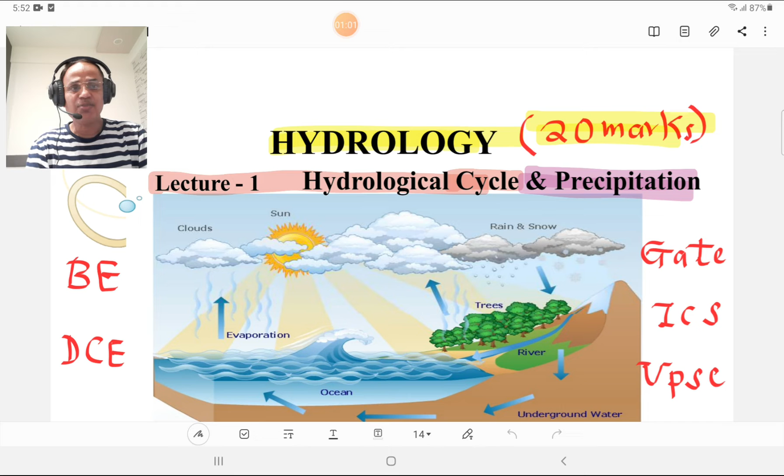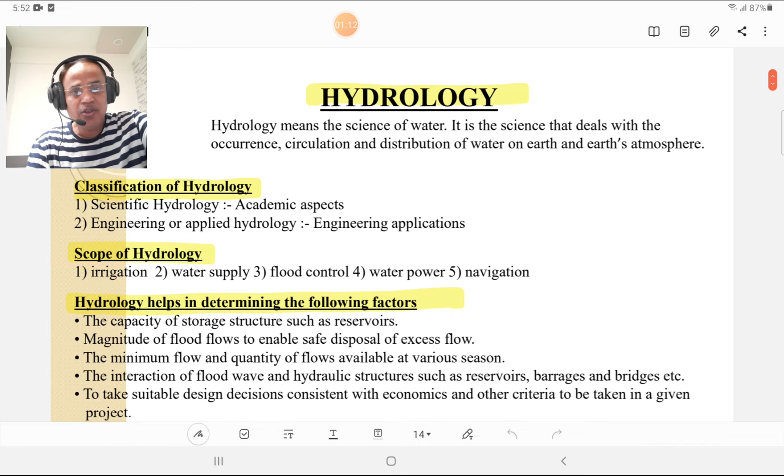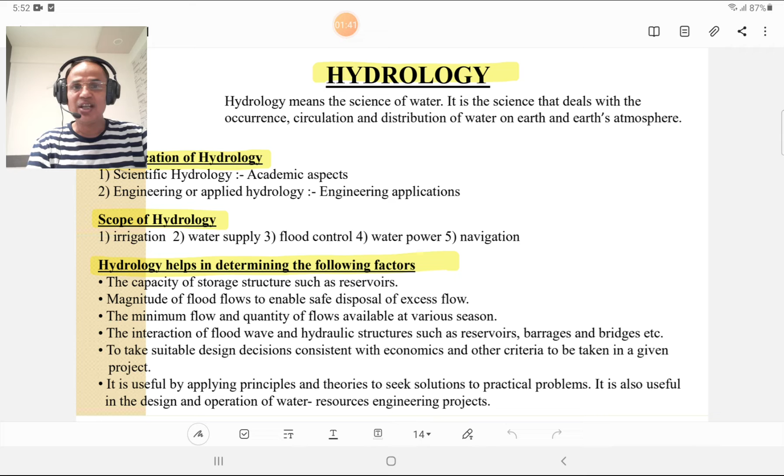First of all, everybody must know what hydrology is. Hydrology means the science of water. It is the science that deals with the occurrence, circulation and distribution of water on earth and in earth's atmosphere. Hydro means water and logy means science, so hydrology means science of water.

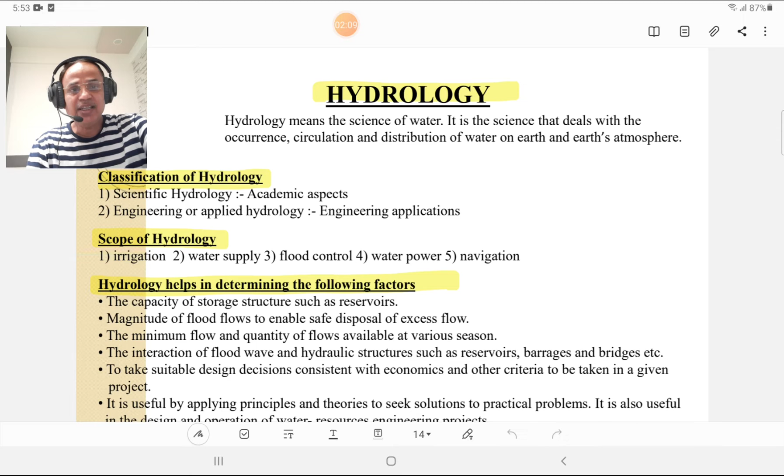Classification of hydrology: scientific hydrology is for academic aspects, and engineering or applied hydrology is for engineering applications. What is the scope of hydrology? Hydrology is useful in irrigation, water supply, flood control, water power and navigation. Hydrology helps in determining the following factors: the capacity of storage reservoir.

The capacity of storage reservoir is calculated by using hydrology, the magnitude of flood flows to enable safe disposal of excess flow. Hydrology is important for determining the minimum flow and quantity of flow available at various seasons such as dry season, wet season, summer season, winter season and rainy season.

It is useful for the interaction of flood wave and hydraulic structures such as reservoirs, barrages and bridges etc., to take suitable design decisions consistent with economics and other criteria in a given project, and it is useful for applying principles and theories to seek solutions to practical problems. It is also useful in design and operation of water resources engineering projects. So hydrology is very important in irrigation engineering as well as water power engineering.

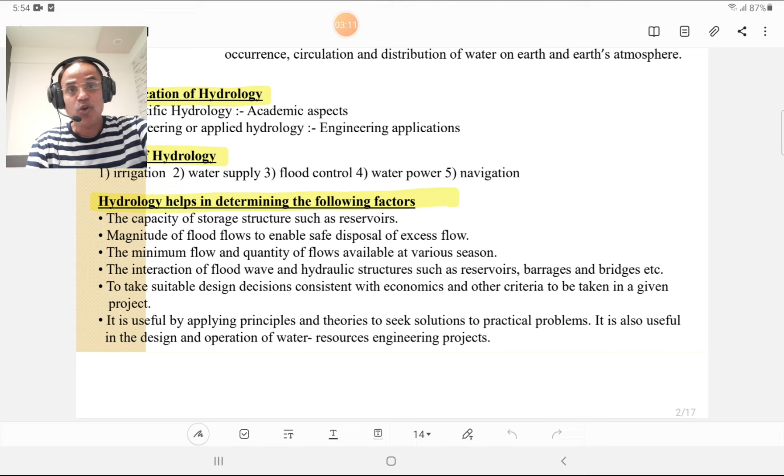The supplementary sciences to hydrology are meteorology, geology, statistics, chemistry, physics, and fluid mechanics. All these sciences are related to each other to derive the various principles.

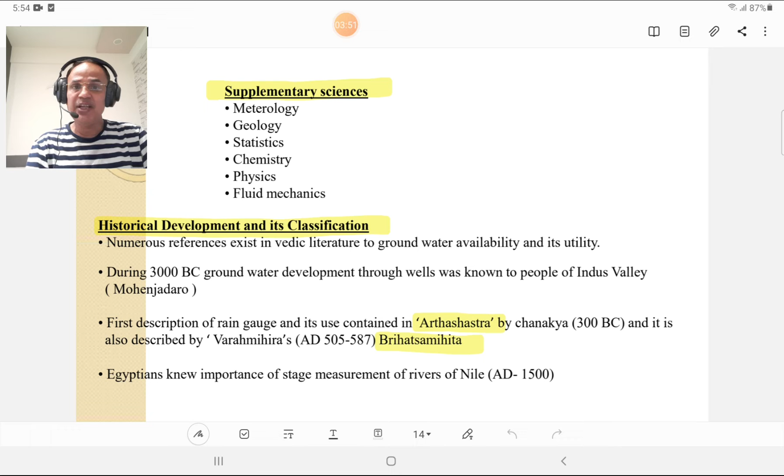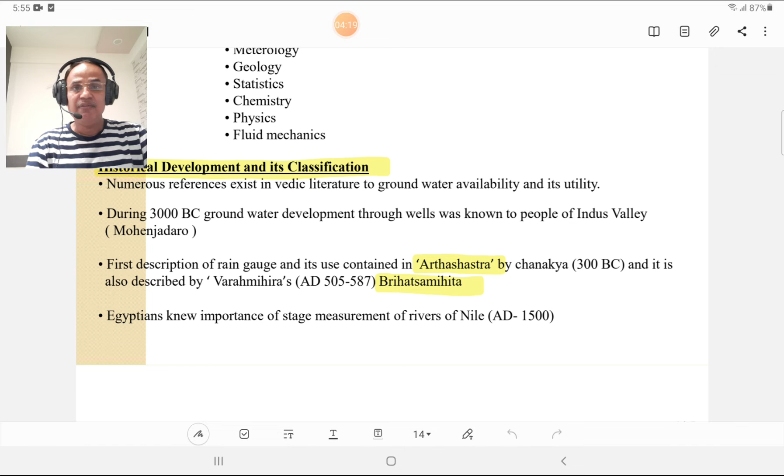What is the historical development of hydrology and its classification? Numerous references exist in Vedic literature to groundwater availability and its utility. During 3000 BC, groundwater development through wells was known to the people of Indus Valley, that is Mohenjo-daro Sanskriti. First description of rain gauge and its use is contained in Arthashastra by Chanakya in 300 BC, and it is also described by Varaha Mihira in AD 505 to 587 in Brihat Samhita. Egyptians knew the importance of stage measurement of river Nile in AD 1500.

Then we will discuss the important cycle. This cycle must be known to all people, but we describe it scientifically - that is the hydrological cycle. It is the cycle followed by water in three phases: first is evaporation, second is precipitation, and third is runoff. The amount of water remains unchanged. For hydraulic equilibrium, inflow of water is equal to outflow of water plus water stored. The second equation is precipitation equals runoff plus evaporation.

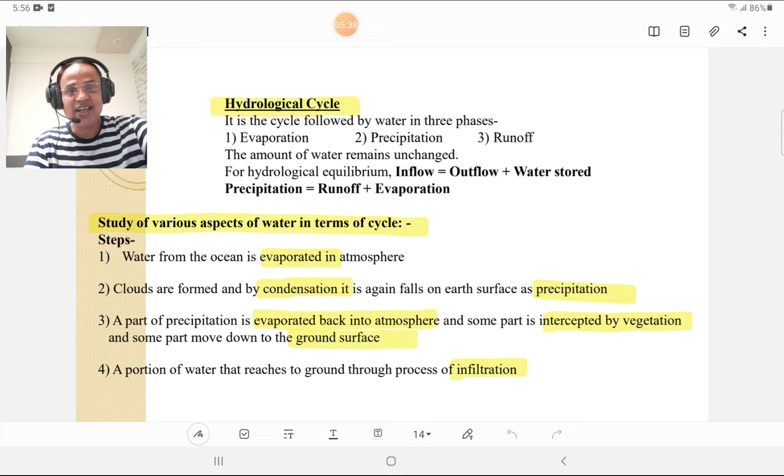These equations are also known as water budget equations. Study of various aspects of water in terms of cycle is termed as the hydrological cycle. Steps: water from the ocean is evaporated into the atmosphere. Clouds are formed and by condensation it again falls on earth's surface as precipitation. A part of precipitation is evaporated back into atmosphere and some part is intercepted by vegetation and some part moves down to the ground surface. A portion of water that reaches the ground goes through the process of infiltration. The portion of infiltration or precipitation which reaches the stream channel is termed as runoff.

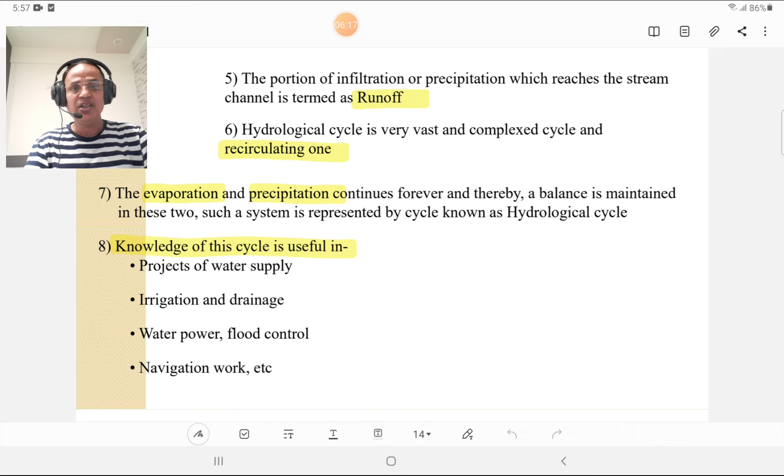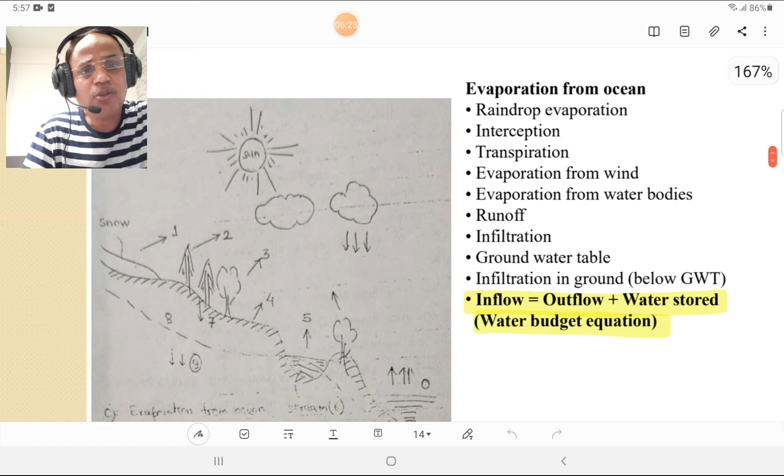The hydrological cycle is a very vast and complicated cycle and it is also a recirculating one. The evaporation and precipitation continue forever and thereby a balance is maintained between these two, and such a system of balance between evaporation and precipitation is termed as the hydrological cycle. The knowledge of this cycle is useful in projects of water supply, irrigation and drainage, water power, flood control, and navigation work, etc. So knowledge of the hydrological cycle is very important. This hydrological cycle is explained in terms of a diagram here. The diagram shows the evaporation from the ocean also.

Evaporation from the ocean is shown here. Then raindrop evaporation is also there. Interception is also there. Transpiration is also there, including transpiration from trees.

This number 5 is evaporation from the water bodies. Then evaporation from wind, runoff, infiltration, and groundwater table. This is the groundwater table shown, and infiltration of the ground below the groundwater table.

Inflow is equal to outflow plus water stored. This is the water budget equation, and this is nothing but the hydrological cycle. The sun is shown here, and clouds are also shown, formed by condensation. Precipitation is also shown from the clouds. Such a cycle is termed as the hydrological cycle.

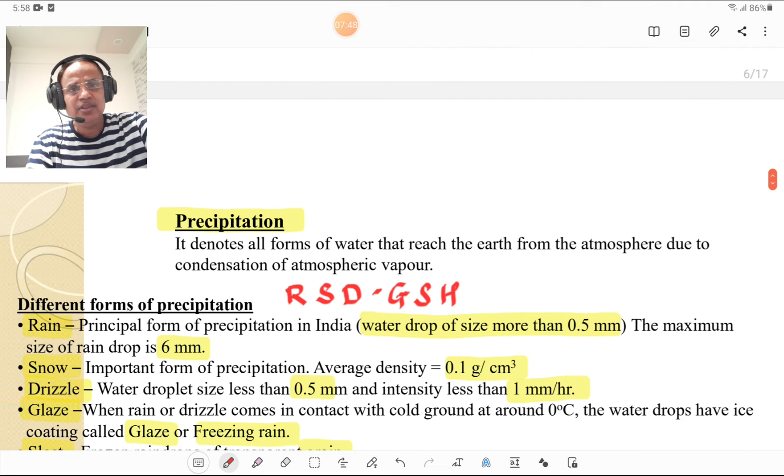Then we will move to our second topic, that is precipitation. Precipitation denotes all forms of water that reach the earth from the atmosphere due to condensation of atmospheric vapor. The condensation of atmospheric vapor in terms of water is termed as precipitation.

Different forms of precipitation are very important and are always asked in competitive examinations, so we must remember RSD and then GSH, the first letters of each form. R means rain, the principal form of precipitation in India. The water droplet size is more than 0.5 mm and up to 6 mm, so water droplets from 0.5 mm to 6 mm are termed as rain.

Then second is S for snow, an important form of precipitation with average density of 0.1 gram per centimeter cube. Then comes drizzle: when water droplet size is less than 0.5 mm and intensity is less than 1 mm per hour, such a form of precipitation is termed as drizzle.

Then comes glaze. G means glaze: when rain or drizzle comes into contact with cold ground at around 0 degrees Celsius, the water drops get an ice coating. Such ice-coated water drops are called glaze or freezing rain. Then S means sleet: frozen raindrops of transparent grain are termed sleet.

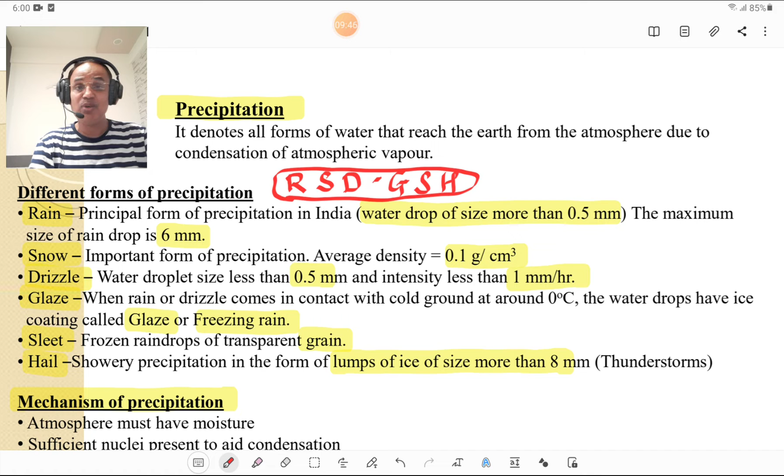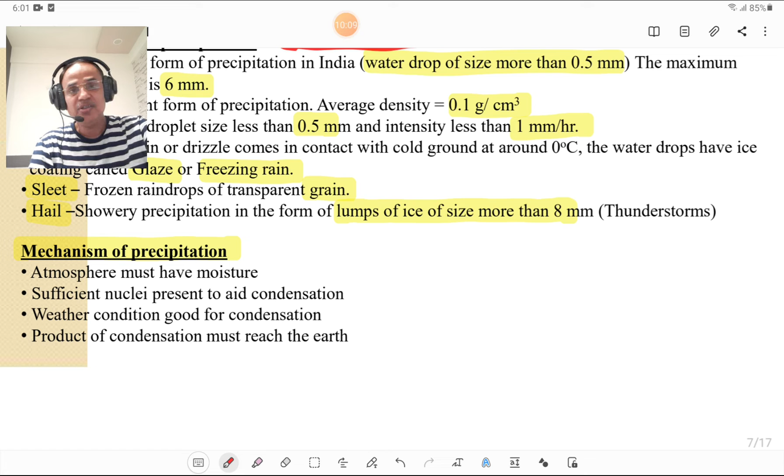Then we will discuss the mechanism of precipitation. For precipitation, the atmosphere must have moisture, sufficient nuclei present to aid condensation, weather conditions good for condensation, and the product of condensation must reach the earth. This is important for the mechanism of precipitation.

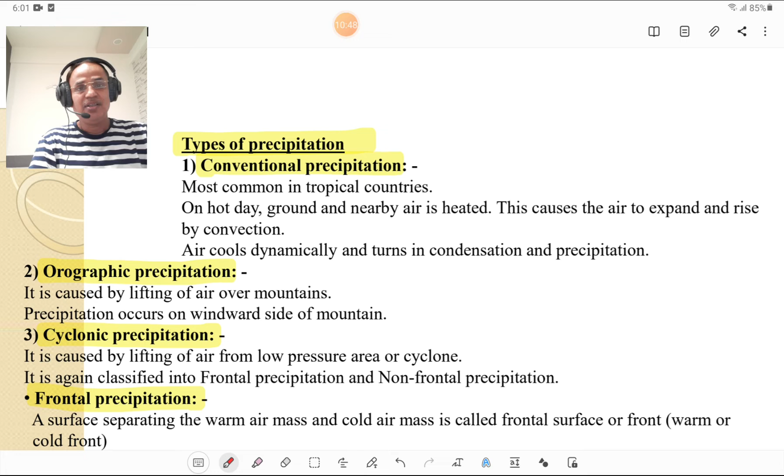Having discussed the forms of precipitation, we now discuss the types of precipitation. First is convective precipitation, most common in India and in tropical countries. On a hot day, the ground and nearby air is heated, causing air to expand and rise by convection. The air cools dynamically and turns into condensation and precipitation. So heating of air causes precipitation; such heating, condensation and convection is termed convective precipitation.

Second is orographic precipitation, caused by lifting of air over mountains. Precipitation occurs on the windward side of the mountain, the side that carries the wind, while the other side is called the leeward side. Third type of precipitation is cyclonic precipitation, caused by lifting of air from a low pressure area or a cyclone.

Cyclonic precipitation is caused by lifting of air from a low pressure area or cyclone, and is classified into frontal precipitation and non-frontal precipitation. Frontal precipitation occurs where a surface separating the warm air mass and cold air mass is called a frontal surface or front.

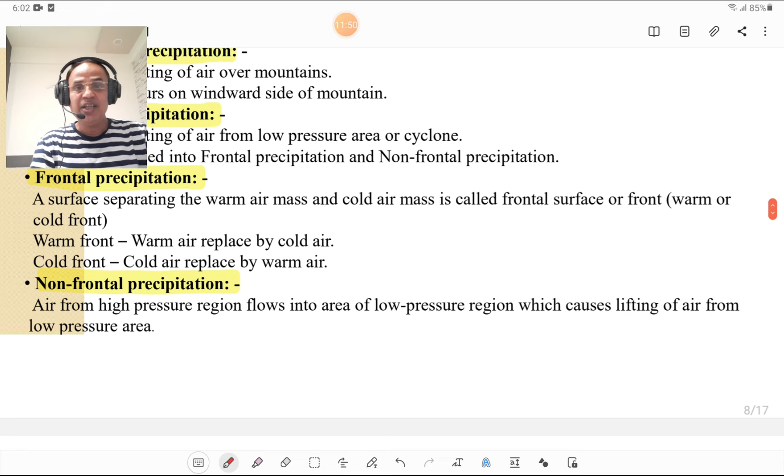In a warm front, warm air is replaced by cold air, and in a cold front, cold air is replaced by warm air; such precipitation is called frontal precipitation. Non-frontal precipitation is when air from a high pressure region flows into an area of low pressure, causing lifting of air from the low pressure area, and such precipitation is called non-frontal precipitation.

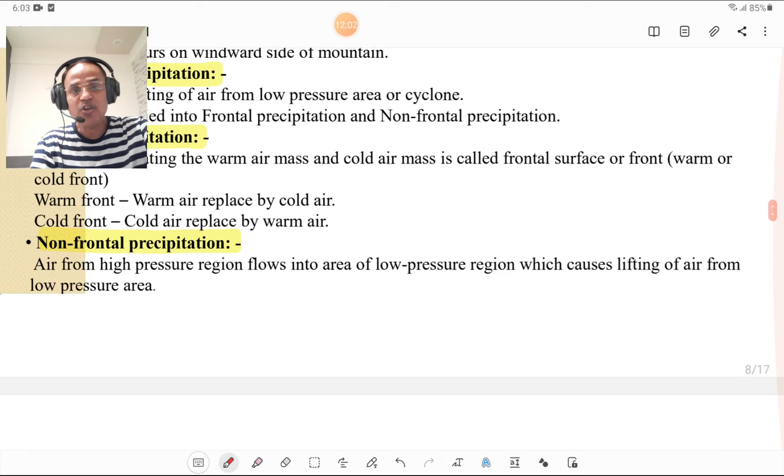Then we will discuss an important topic in precipitation, measurement of precipitation. Precipitation, you must know, is nothing but rainfall. Rainfall is the depth of water in centimeters or millimeters that would stand on the earth provided it were not lost by evaporation or infiltration or any other manner. That is, the depth of water received from rainfall which is not lost by evaporation, percolation, or any other manner.

Various types of gauges used for measurement of rainfall or precipitation are automatic and recording type gauges, and second is the non-recording type of gauges.

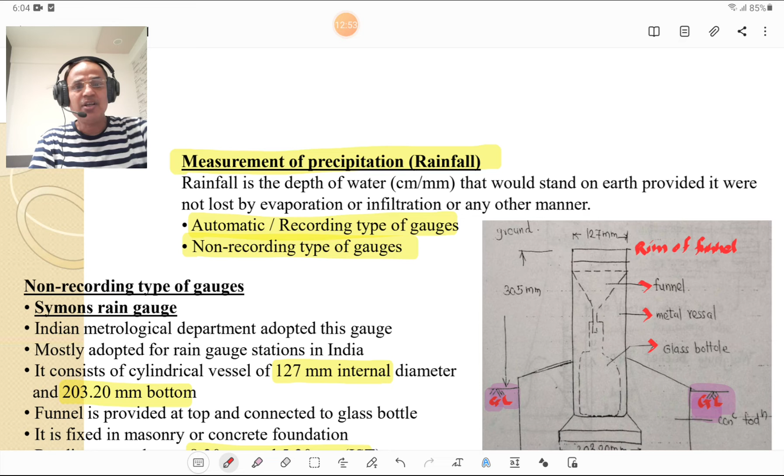Non-recording type of gauges, the Symons rain gauge is very important, and it is used from historical time, from the ancient time of the British. Symons rain gauge was adopted by the Indian Meteorological Department, mostly for rain gauge stations in India.

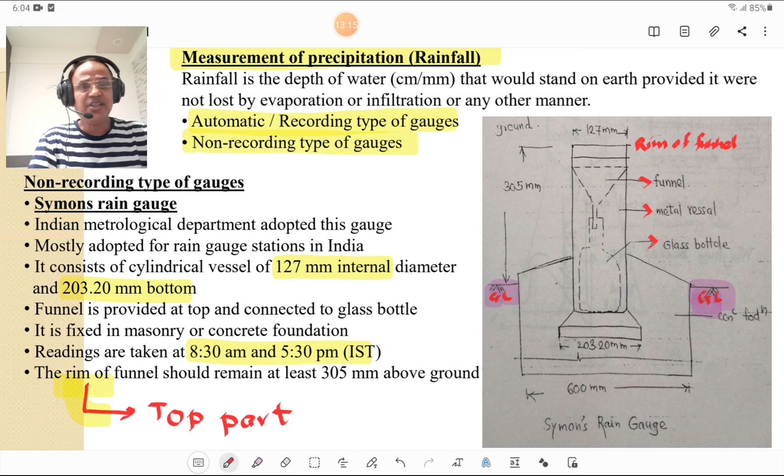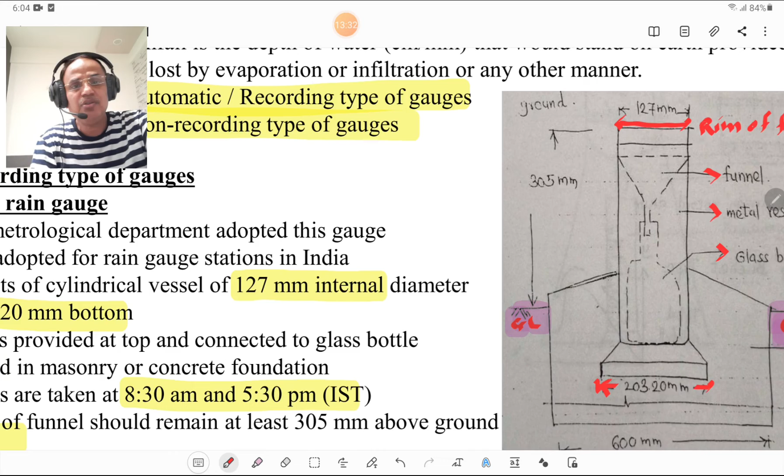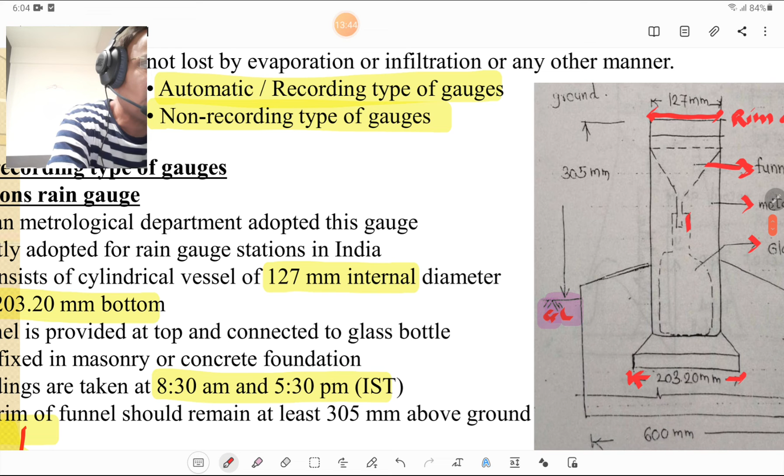It consists of a cylindrical vessel of 127 mm internal diameter, shown here as 127 mm internal diameter, and 203.20 mm at the bottom. This is the bottom size. A funnel is provided at the top. Please look at this figure. This is the funnel, provided at top, and it is connected to a glass bottle. This is the glass bottle, and the funnel is connected to the glass bottle.

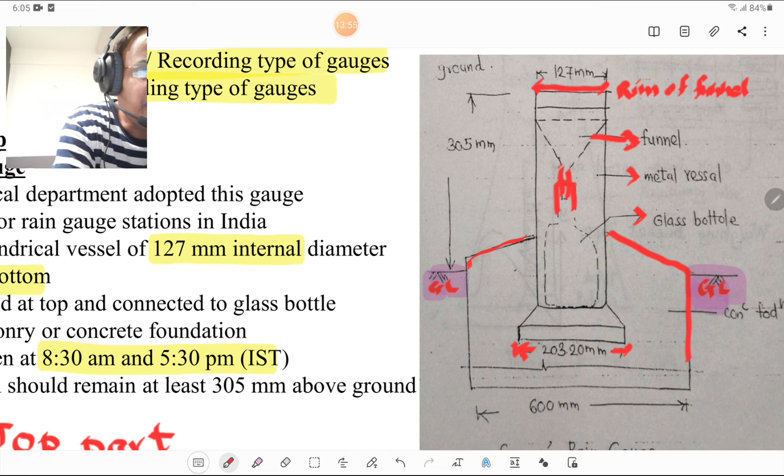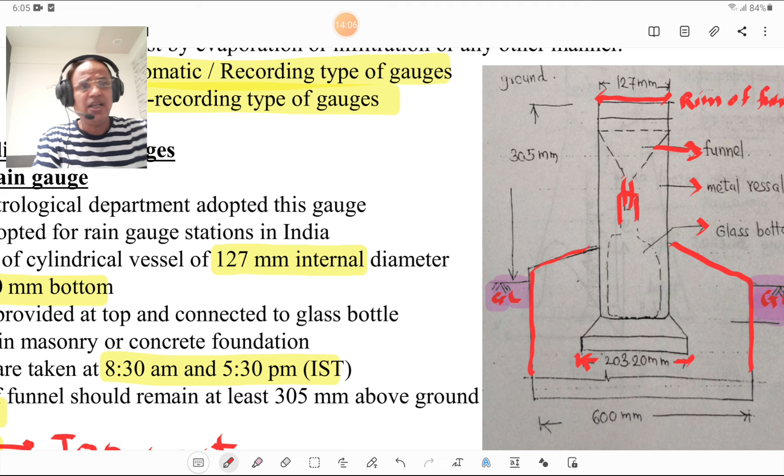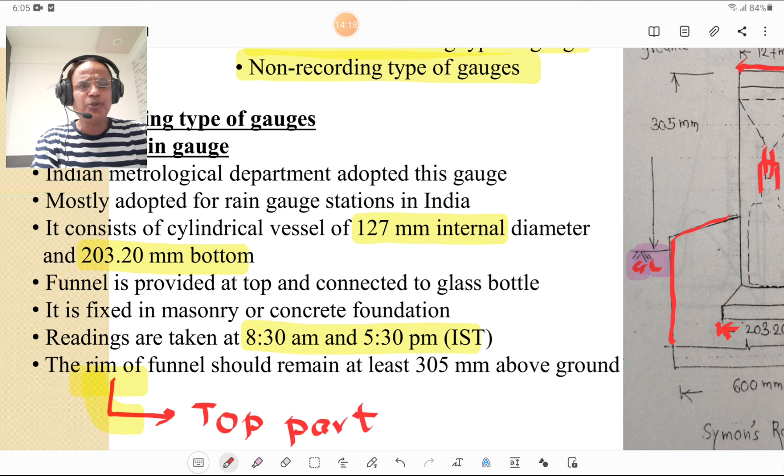It is fixed in masonry or concrete foundation. You must know the system: there is one vessel, the vessel contains a bottle, on top of the bottle there is a funnel, and this whole system is fixed in the foundation. Readings are taken at 8:30 am and 5:30 pm Indian Standard Time. The rim of the funnel should remain at least 305 mm above the ground. Rim means this, the top of the funnel. This should be 305 mm above the ground, if this is the ground level.

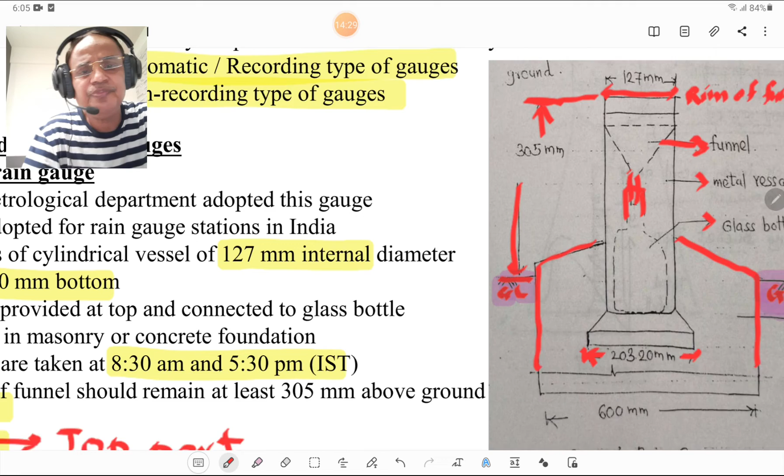This is only the first type, the non-recording gauge. Now we will discuss the recording type of gauges, termed as automatic or self-recording gauges. First is the weighing bucket type.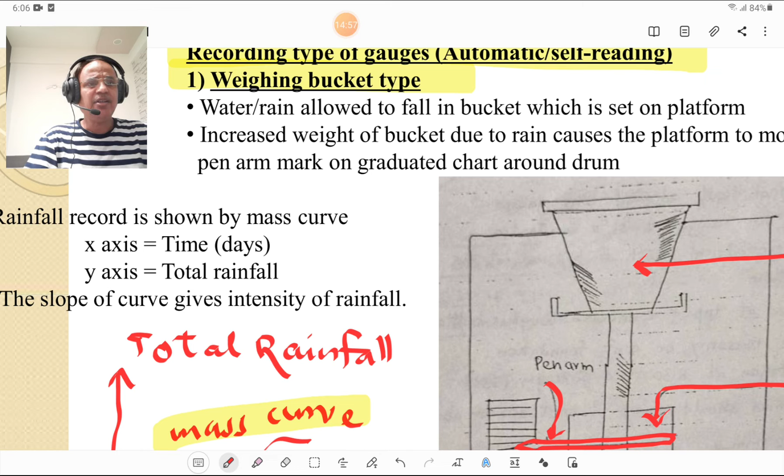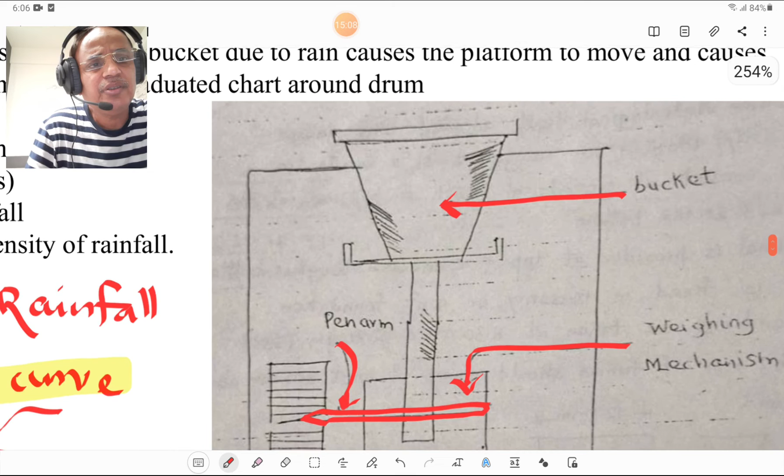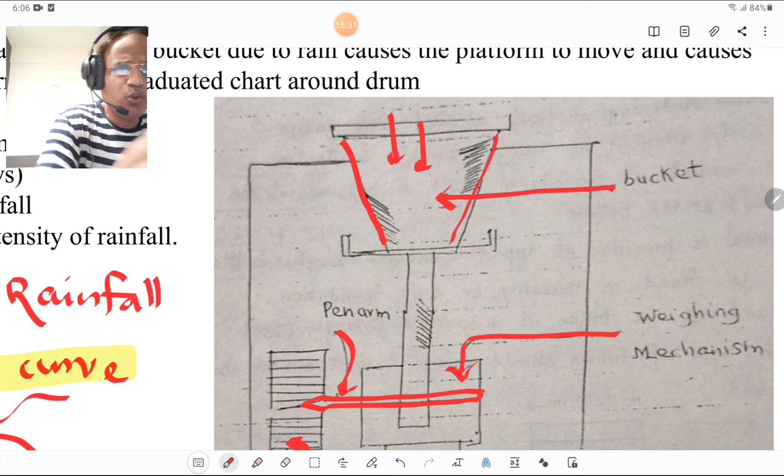Water or rain is allowed to fall into the bucket which is set on a platform. Increased weight of the bucket due to rain causes the platform to move, and the pen arm marks on the graduated chart around the drum. Please look at this figure. This is the bucket, as shown here. If rainfall is received in the bucket, it causes the pen arm to move due to the weight of water, and this pen mark is moved by the weighing mechanism on the clock-driven record drum, and the mass curve is plotted.

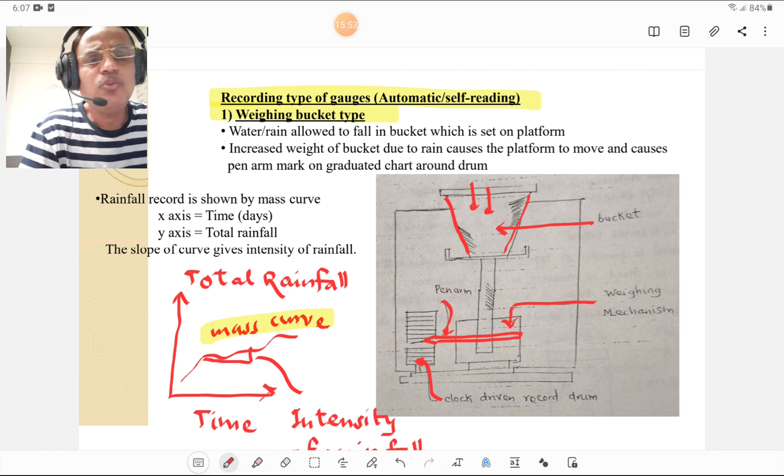Water or rain allowed to fall into the bucket set on the platform causes increased weight, and the pen arm marks the graduated chart on the drum, and the rainfall record is shown by the mass curve. On the x-axis time is plotted, on the y-axis total rainfall is plotted, and the slope of the curve gives the intensity of rainfall. The time is in days and total rainfall is in mm or centimeter.

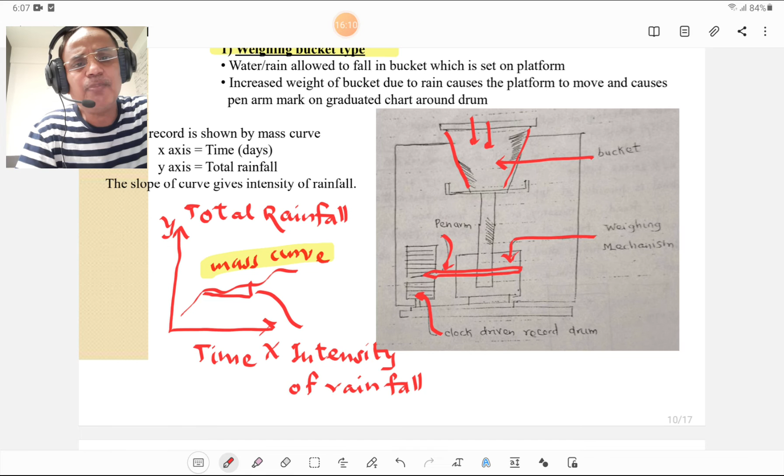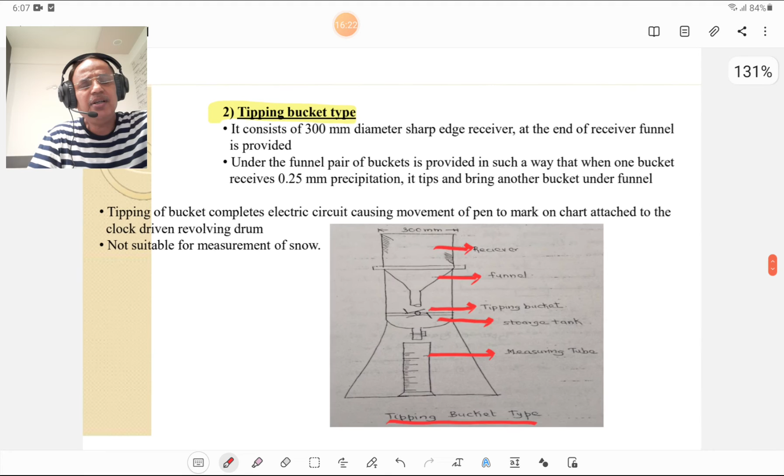Then we discuss the second type of self-recording or automatic gauge, the tipping bucket type. It consists of a 300 mm diameter sharp-edged receiver, at the end of which a funnel is provided. Under the funnel there is a pair of buckets arranged so that when one bucket receives 0.25 mm of precipitation, it tips and brings another bucket under the funnel. So it is called the tipping bucket type of recorder. Tipping of the bucket completes the electrical circuit, causing the movement of a pen to mark on a chart attached to the clock-driven revolving drum. The mass curve is plotted, and it is not suitable for the measurement of snow.

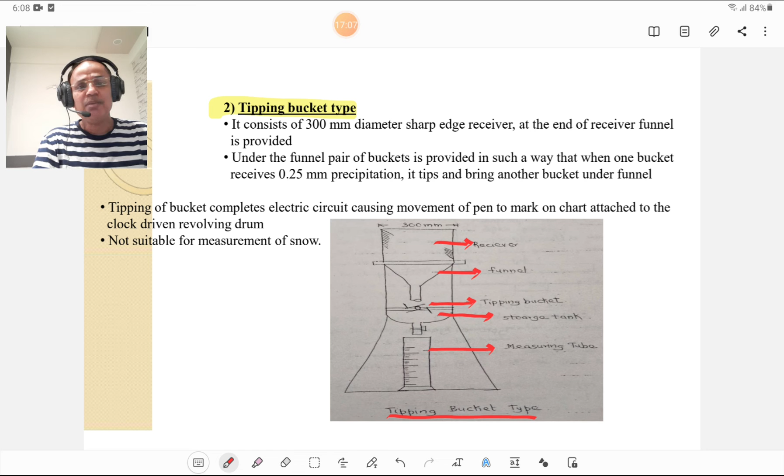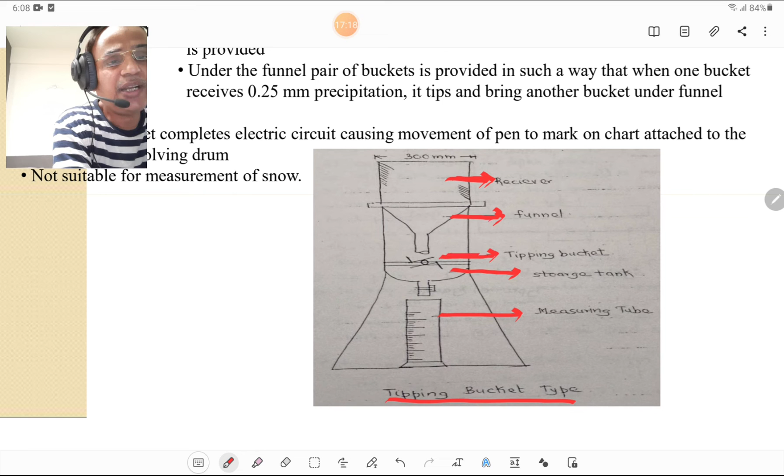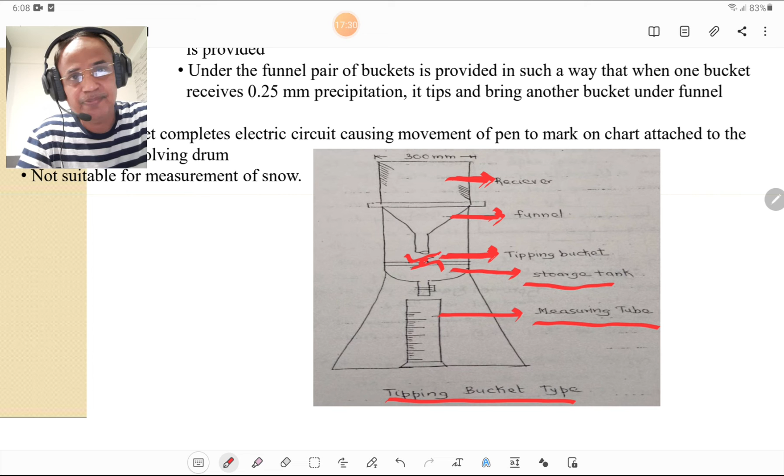Tipping bucket type, please look at this figure. The figure shows the receiver and the funnel also. This is the pair of tipping buckets which causes the circuit to complete. This is the storage tank, and the measuring tube is also shown here. Please remember this diagram.

Then the third type is the float type of gauge, or siphon gauge. Its working is similar to the weighing bucket type gauge. As the water level rises in the container, due to the float, siphonic action starts and water is drained out. The pen arm connected to the float rod marks the amount of rainfall on the revolving drum.

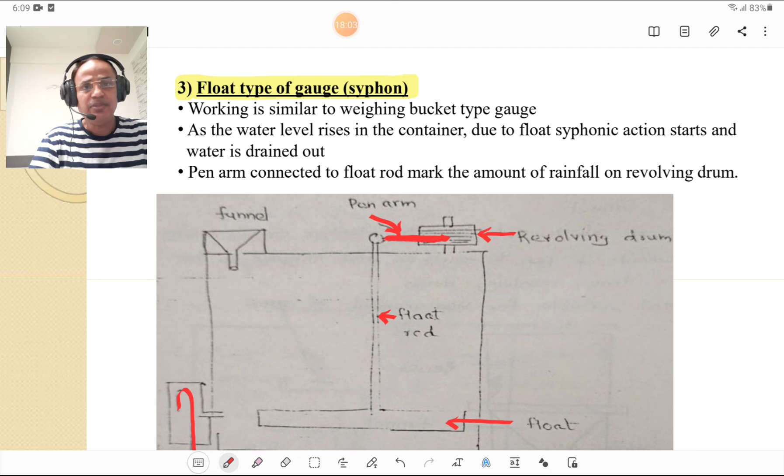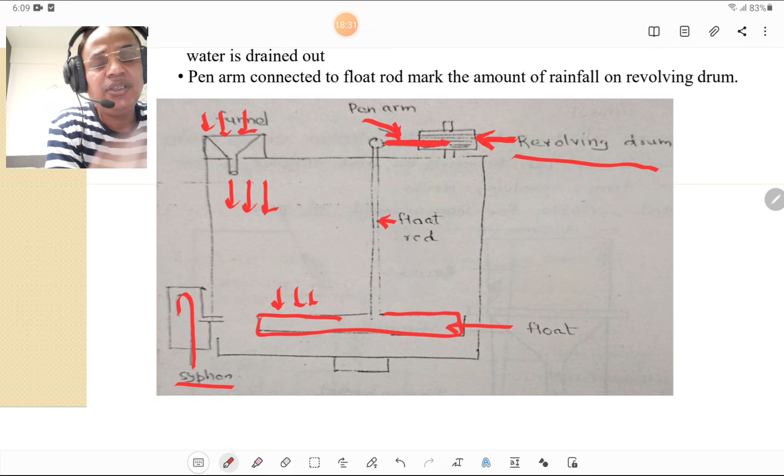Please look at this figure. This is the funnel, from where we get the rainfall or precipitation, and this is the float. The movement of this float causes the pen arm to mark the intensity of rainfall in terms of a mass curve on the revolving drum, and water is drained off by siphonic action.

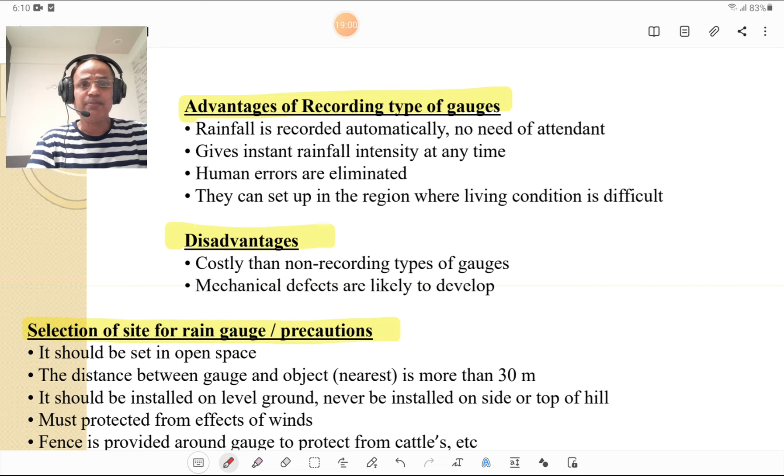Then we will discuss the advantages of recording type gauges: rainfall is recorded automatically with no need of an attendant, it gives instant rainfall intensity at any time, human errors are eliminated, and they can be set up in regions where living conditions are difficult. Disadvantages: it is costlier than non-recording type gauges, and mechanical defects are likely to develop. Those are the disadvantages of automatic type gauges.

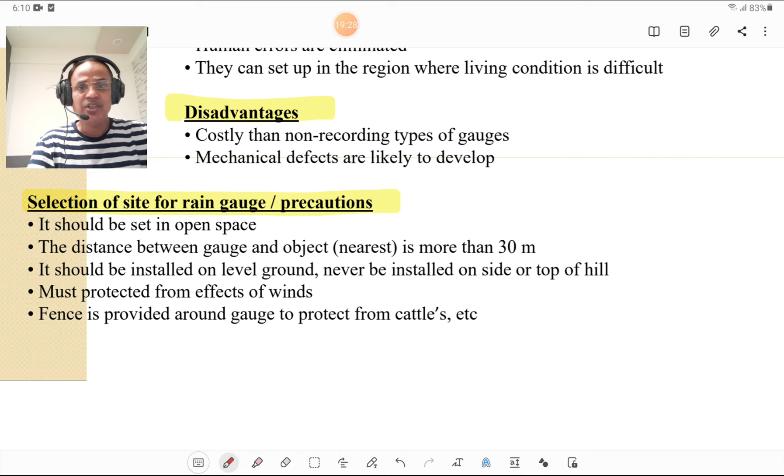Then we will discuss the selection of site for a rain gauge. It should be set in an open space. The distance between the gauge and the nearest object should be more than 30 meters. It should be installed on level ground, never on the side or top of a hill. It must be protected from the effect of winds, and a fence is provided around the gauge to protect it from cattle.

Recommendation of rain gauge site as per IS 4986/87 1983: in plain area, one station for every 520 square kilometer area. In hilly areas where heavy rainfall is expected, one station for 130 square kilometers. In regions where average elevation is 1000 mm above sea level, 2 stations, and 1 station for 260 to 390 square kilometer area. Please remember these figures.

These are 130 for heavy rainfall expected in hill areas, 260 to 390 where average elevation is 1000 mm above sea level, and in plain area it is 1 station for 520 square kilometers.

Then, optimum rain gauge network design: there is one formula, N, that is optimum number of rain gauges. N is equal to CV divided by P, whole squared. N is the optimum number of rain gauge stations, CV is coefficient of variation, and P is the degree or percentage of error in estimate of depth of rainfall over the basin.

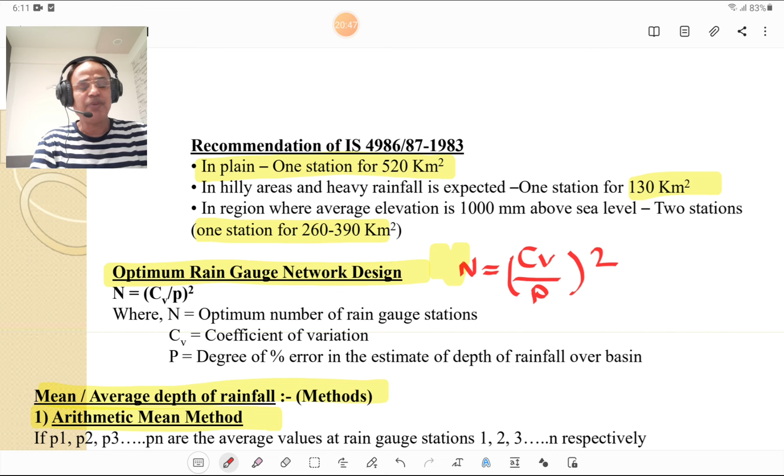Then, mean or average depth of rainfall. There are various methods to calculate mean or average depth of rainfall, meaning precipitation. First is the arithmetical mean method.

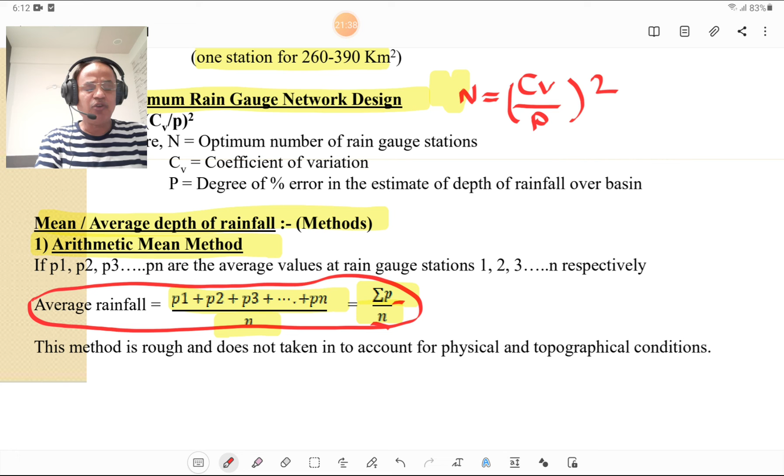If P1, P2, P3, and so on Pn are the average values of precipitation at rain gauge stations 1, 2, 3 and n respectively, then average rainfall is calculated by the formula: summation of P divided by n, where n is the number of rain gauge stations, and summation of P means P1 plus P2 plus P3 plus Pn. This method is rough and does not take into account physical and topographical conditions. This is the straightforward arithmetical mean method.

Second is the Thiessen polygon method, also termed the weighted mean method. This method is very popular in competitive type examinations.

Then we get four types of polygons: the first contains rain gauge station A, the second contains station B, the third contains station C, and the fourth contains station D. Such a network of four polygons is considered a Thiessen's network, and each Thiessen's polygon contains a rain gauge station.

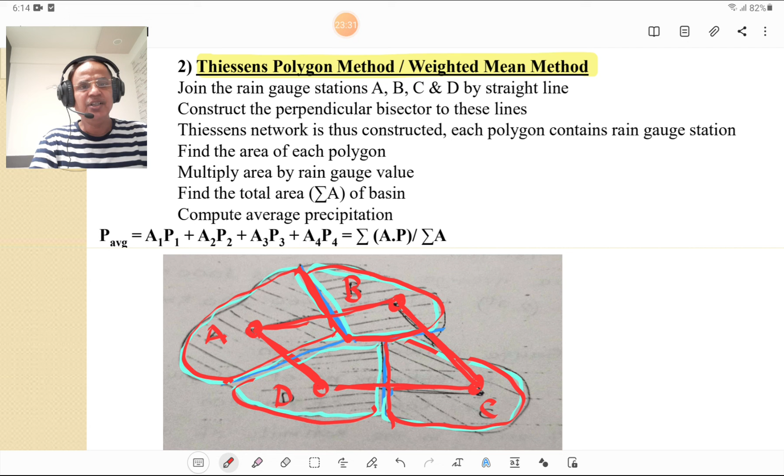Find the area of each polygon, multiply the area by the rain gauge value of precipitation, find the total area of the basin, and compute the average precipitation by the formula: A1 times P1 plus A2 times P2 plus A3 times P3 plus A4 times P4, that is summation of AP divided by summation of A. We get the average rainfall.

Then the third method is the isohyetal method. An isohyet is the line joining points of equal rainfall over the map of the basin.

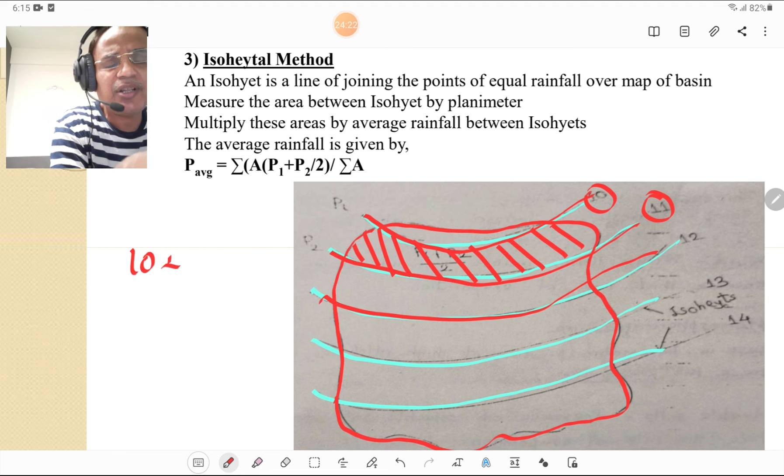Measure the area between the isohyets by planimeter. If this is the first isohyet, this is the second, this is the third, then we measure the area between the isohyets with the help of a planimeter, and multiply this area by the average rainfall between these isohyets. If this has 10 rainfall and this has 11 rainfall, then the average value is 10 plus 11 divided by 2, that is 10.5. We must confirm whether the value is in mm or cm.

The average rainfall is calculated by summation of A into bracket P1 plus P2 divided by 2, whole divided by summation of A. We get the average rainfall.